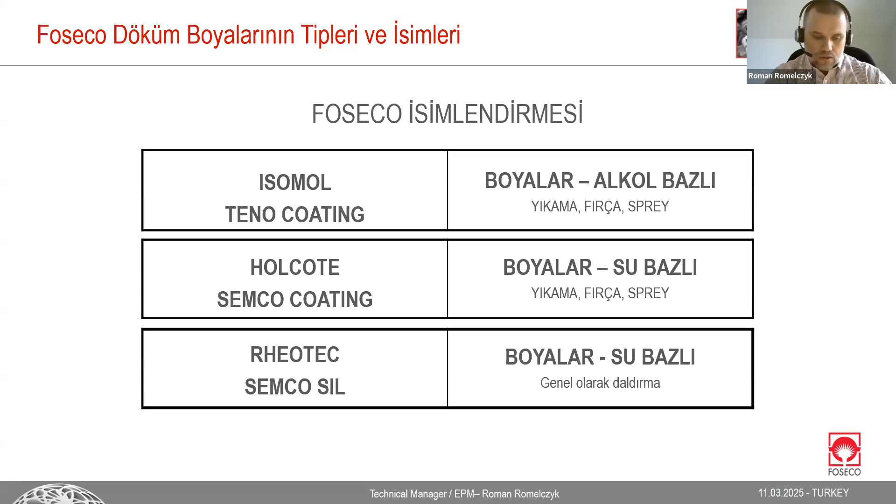We also can talk about special coatings, which are dedicated, for example, for green sand molding to improve the surface of green sand if any problems happened with the green sand recipe. Also for these special coatings, we can put in the same group some coatings from the Semco Zir group and Teno coating group.

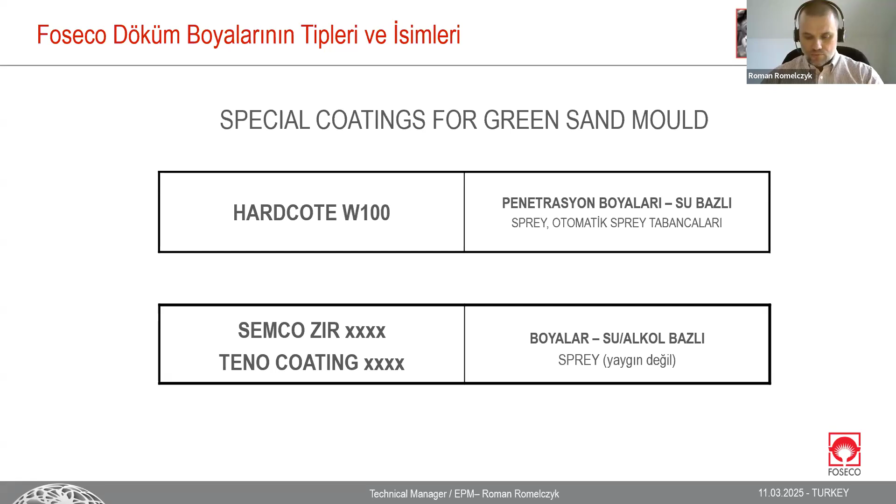As I said, I would like to talk about these coatings from the beginning. So first, I would like to talk about what the coating is, what is in the recipe, what kind of chemicals, what kind of materials are used to create the ready-to-use coating.

The first and most important, we can say, is the liquid carrier. As we said, water or alcohol. Alcohol can be isopropanol or ethanol. In some countries, we can also see blends of alcohol, so between ethanol and isopropanol. Very rarely, but it still happens, we also have some coatings based on methanol.

Of course, in Europe, in our region, it cannot be like that for safety and environmental reasons, so it's banned and blocked. The next one is a suspension agent.

It means that it's a special material or chemical which prevents sedimentation of solids. Solids like zirconium, corundum, aluminium oxides, and others are heavier than liquids such as water or alcohol. So this suspension agent takes care of keeping the solids suspended in the whole volume so they don't sedimentate.

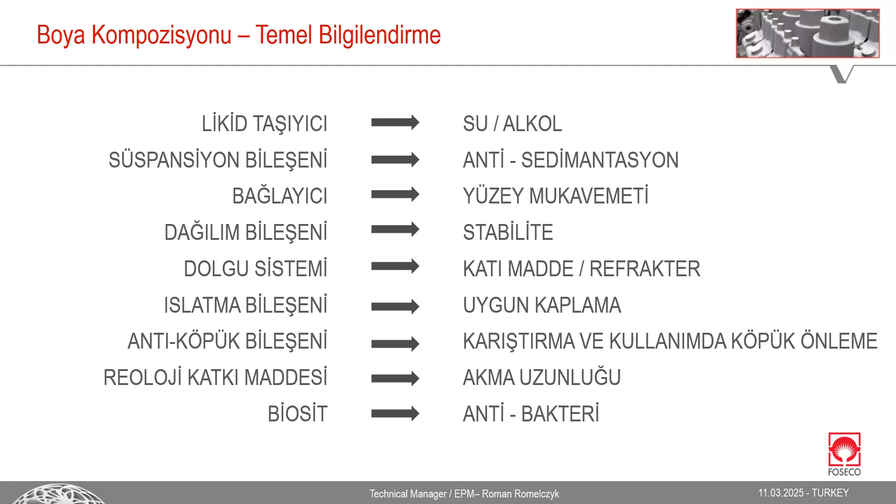Dispersion agent. This agent takes care of the coating during the time it is produced, put in the warehouse, or transported somewhere far from the production site. We need to be sure that the coating during this time will not change behavior, will not change its rheology or thixotropy behaviors. So this dispersion agent takes care of that.

I already touched on the filler system, solids, refractory solids. We will touch this point later.

Wetting agent, also a very important point. Wetting agent is nothing more than chemicals or materials which take care of the wetting angle. We can imagine we have PUCB cores, furan, alkaline phenolic, or others, for which release agents are used which are fatty. It means it's not always easy to cover them, especially with water-based coating. This is why this wetting agent improves, and takes care that the wetting angle will be enough to cover the surface everywhere in the same way, building the same layer thickness everywhere.

When we talk about alcohol-based coating, of course this kind of wetting agent doesn't exist, because alcohol itself has a very small, or depending on the literature, small or very big wetting angle, so there's no problem with it.

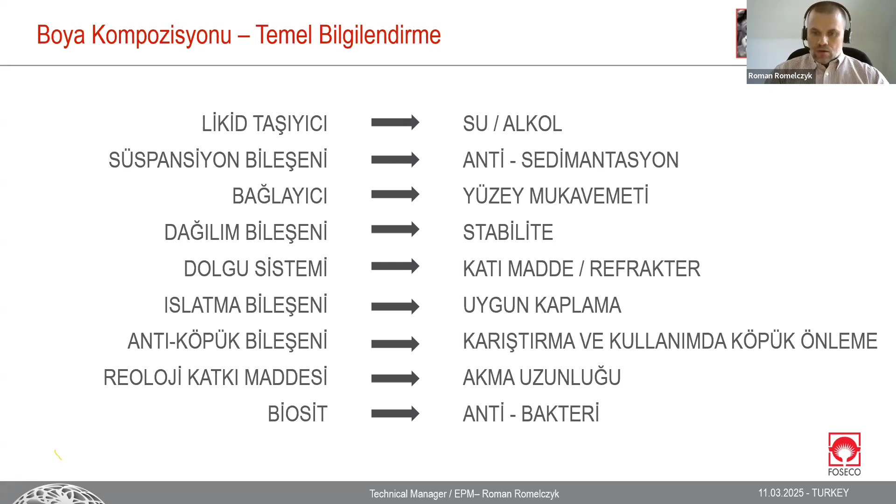So when we talk about solids and refractory materials, the most popular are zircon, corundum, magnesite. Between that, there's graphite, iron magnesium silicate - some kind of olivine - which is very, very popular. Also, as an addition, we use coke, and materials with a lower refractory point, like mullite and silica as well. These are the main raw materials which I believe you are familiar with and work with on a daily basis in your foundries or in your daily work.

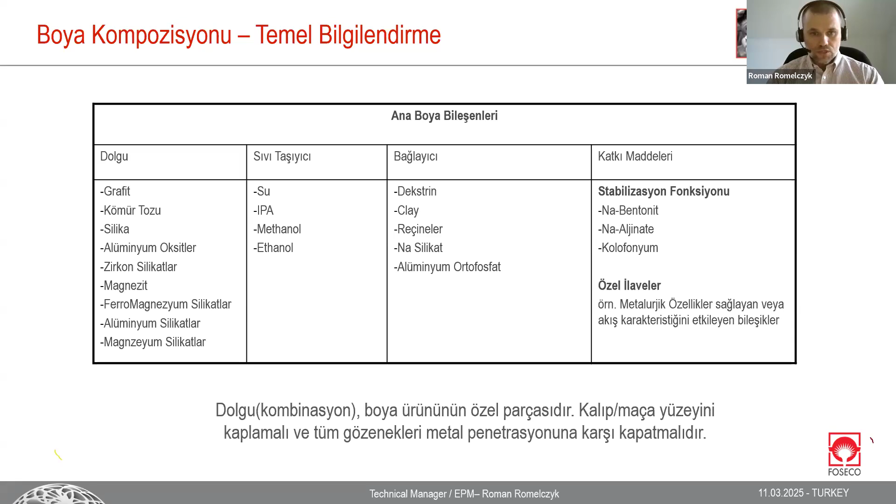So this is a part of the coating, and the big question is: for what do we use coating, why do we use coatings. When we talk about defects, the coating itself cannot cover mistakes in mold or core preparation, but it can help and support the surface finish. So problems like burning, metal penetration, veining - there's a special group of coatings which have anti-veining properties.

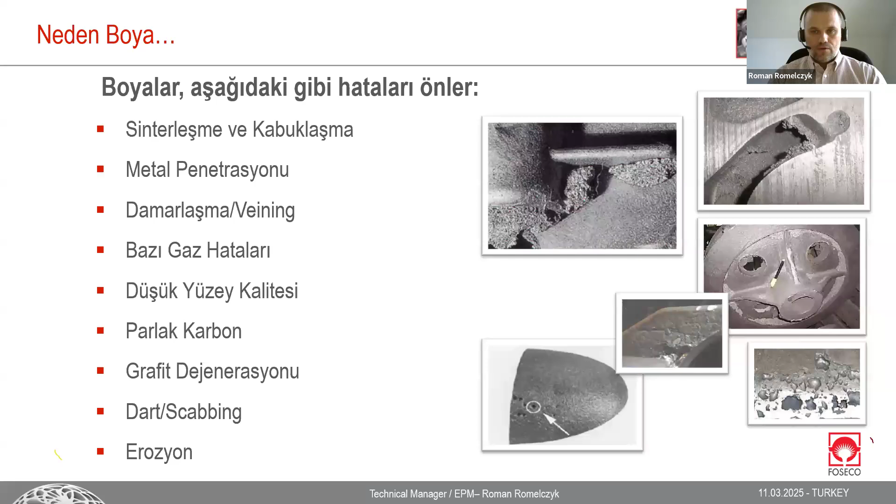Of course, some gas defects, lustrous carbon, and more others. Even some kind of filtration issues, like scabbing. If we talk about the furan mold process, the coatings are able to catch sulfur, which can affect nodular iron, the surface of the casting. So many defects can be improved by coatings.

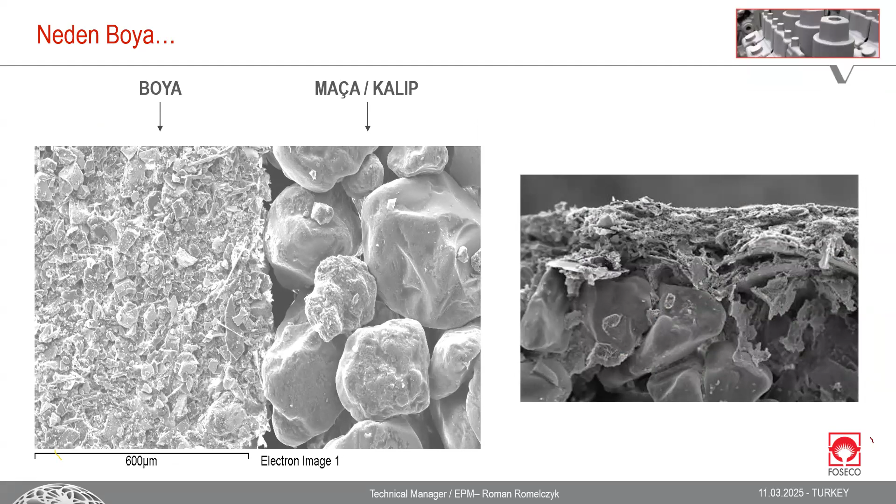So the coating itself, under quite big magnification or zooming, looks like what we can see in these pictures. On the left side we can see the layer of the coating; the right side, of course, is the mold. On the right side of the slide we can see some other coating, more flaky. We can also observe some penetration, so the coating is sucked into the mold by capillary effect, impregnating the layer. So that's how it looks.

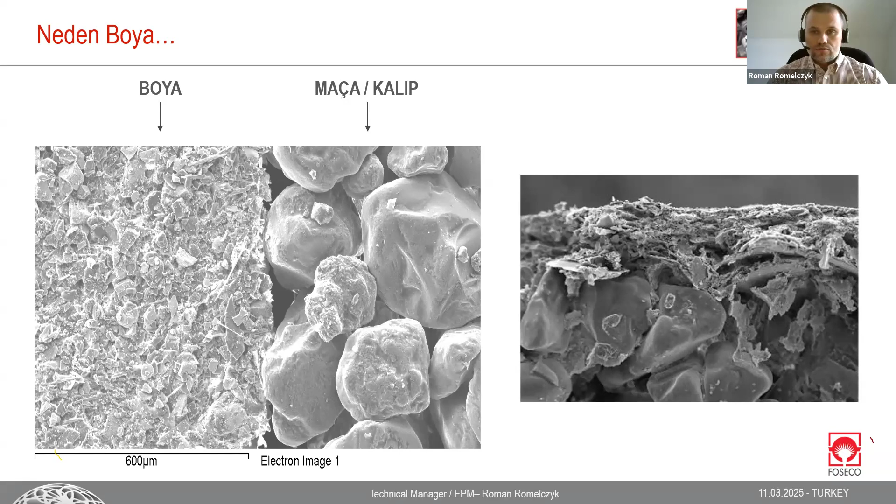Yeah, application methods.

This is an important slide because you can see the same coating applied in four pictures. It's the same coating, but differently applied on the same mold with different viscosity, because for spraying, brushing, dipping, and flow application methods, the viscosity of the coating, and automatically the density as well, is different. For flow and dipping, the coatings are more diluted.

It's around 12, 13, 14 seconds for dipping and flow. For brushing it's around 18 to 20 seconds, depending on what raw materials are used for coating. Zircon, which is roundish in shape, is quite easy to brush. Olivine or magnesite is not that easy for brushing, which is why we need to dilute more, around 18 seconds measured by DIN cup four millimeters.

When we talk about spraying, it depends on the equipment and coating you use, so the viscosity has quite a big range, between 14, 18, even 20, for airless systems that can also be used.

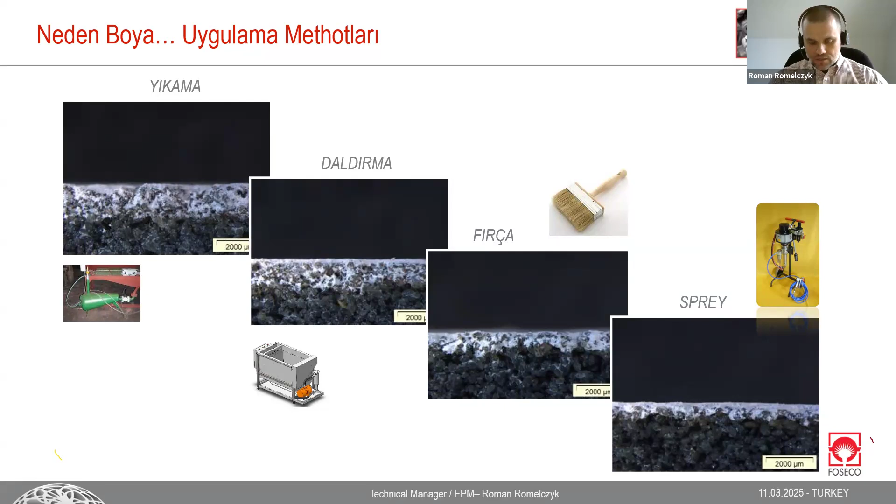The next topic is how to select coatings, so which base, from a raw material and solids point of view, can be used for what kind of alloys. It's not that complicated, but we can still find some problems with it.

For steel, we use solids with high refractory behavior, like zircon, magnesite, aluminum oxides, and corundum. For gray iron, we can use what is used for steel plus some graphite. For heavy metals, we focus on graphite, coke, silicates, magnesium silicates, and zircon as well. For aluminums: graphite, coke, magnesium silicates, and finally zircon and aluminum silicate.

Zircon is the most popular raw material, often used with other mixtures. A coating dedicated for steel isn't necessarily pure zircon, it can be a mixture between zircon and corundum, or mixed specially for gray iron or nodular iron if needed, combining zircon, olivine, and graphite or coke. So there are many possibilities here.

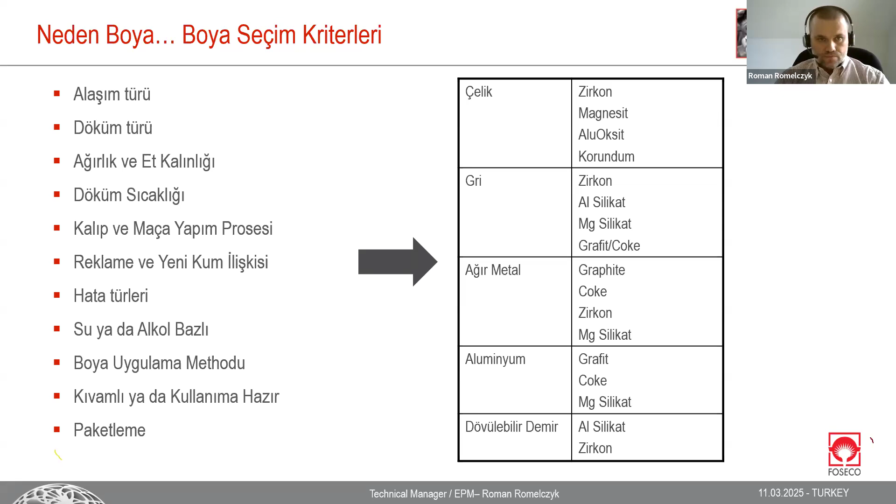So now we know a bit about the recipe, the application methods, and the raw materials we use, the refractory solids. Now I will switch to the topic of usage.

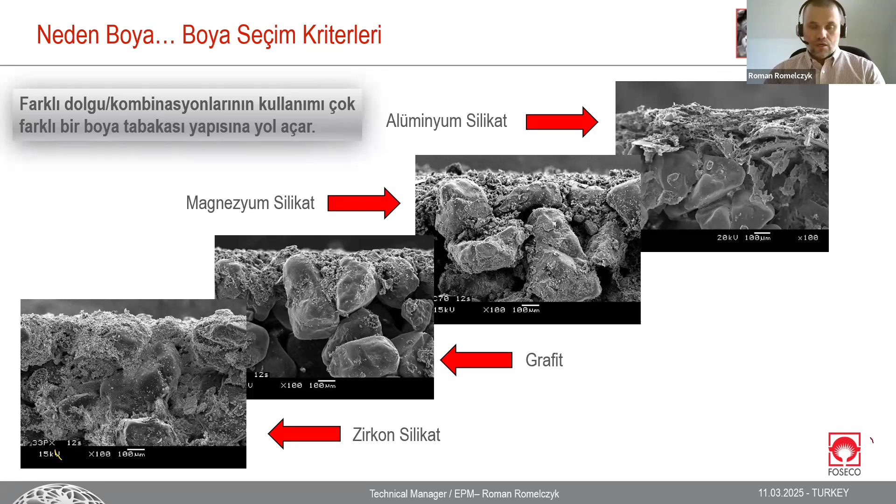What kind of mistakes are very often observed during application? As I already explained, sometimes the coating is not properly selected. It's also important that the recipe itself has 10, 11, 12 different materials mixed together with different weight and density, so this coating always needs to be super precisely mixed before use, to be sure all materials work together. An observed mistake is that it's not properly mixed.

What's more, and I'll touch on this point later, it's also very often the case that the coating during preparation and after application is not controlled, things like viscosity, density, Baumé, wet layer thickness, dry layer thickness. Wet and dry layer thickness will always be different because of shrinking during drying, since if the carrier disappears, the coating will obviously shrink a bit.

What's more, this is not without reason. These pictures show the mold or core just after the coating is applied. Now we talk about alcohol-based coatings. Just after application, the mold or core is set on fire, meaning we don't wait any minutes, 10 minutes, half an hour, but immediately we burn it out. It's quite a big mistake, and I will try to explain and show why.

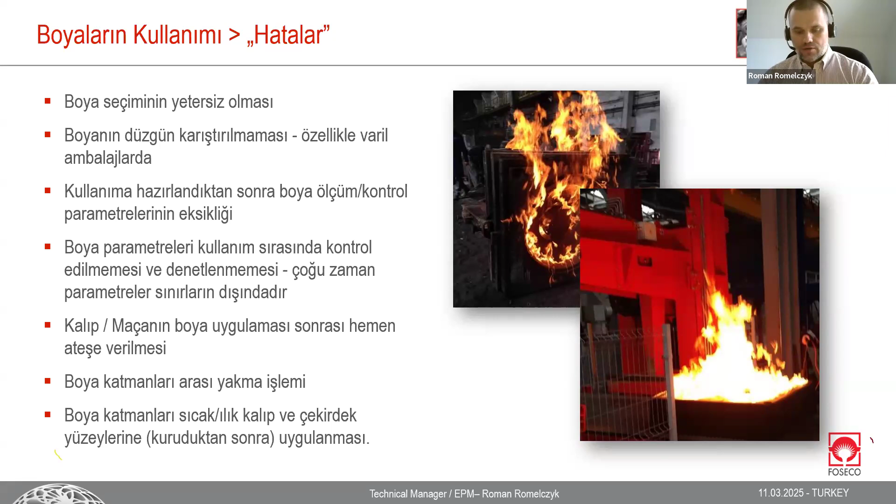So the advice is nothing more than the opposite of what I showed before. We need to mix, we need to control, we need to take care about wet-on-wet layer application. Drying by flame, yes, but really only if it's needed - that's the first point. Another one: if it's needed, don't rush, don't be in a hurry with it.

Wait some minutes to give a chance to finish some kind of matting time, so the mold or core stops being shiny. It means that the alcohol disappeared inside, sucked in by the core or mold, and evaporates a bit, and after that we can burn it out, put it on fire. Why? Because if this coating disappears inside and outside, evaporating a bit, the energy created during the flaming will be less.

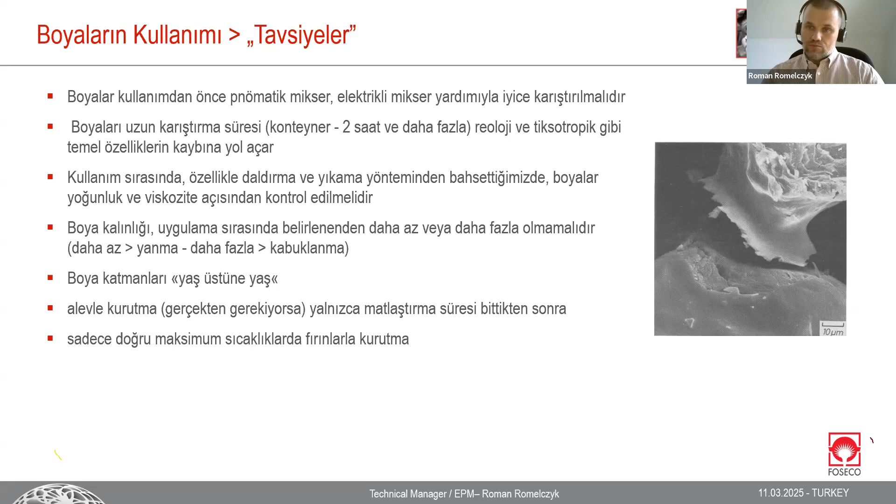In the picture, you can see the bridge - this is a binder bridge between the grain sizes. These binder bridges are killed and damaged by fire. So this is not exactly a picture showing the influence of fire, but it's only to give you a visual effect of how the bridges look like. If we destroy these bridges, it means the sand cannot stick together strongly enough.

Tools which can be used very easily everywhere in the foundry: on the left side, top, it's a comb for checking the wet layer thickness. Very often it's also used to check dry layer thickness - we need to scratch a bit, it's not super precise, but it's still able to check and compare wet with dry. Pycnometer, very simple tool.

For this pycnometer we also need a balance, a small balance, and we need 2-3 minutes to know exactly what kind of density we have. Ford cup, DIN4, this is a 100 milliliter cup, and we can measure viscosity very quickly. Baumé, it's a measurement somewhere between viscosity, density, and also rheology.

So Baumé is still in use, but for foundry usage it's quite imprecise. For production and QC lab it's useful, for foundry it gives guidelines. It's not super precise, but still in use, and it's possible to get by with it.

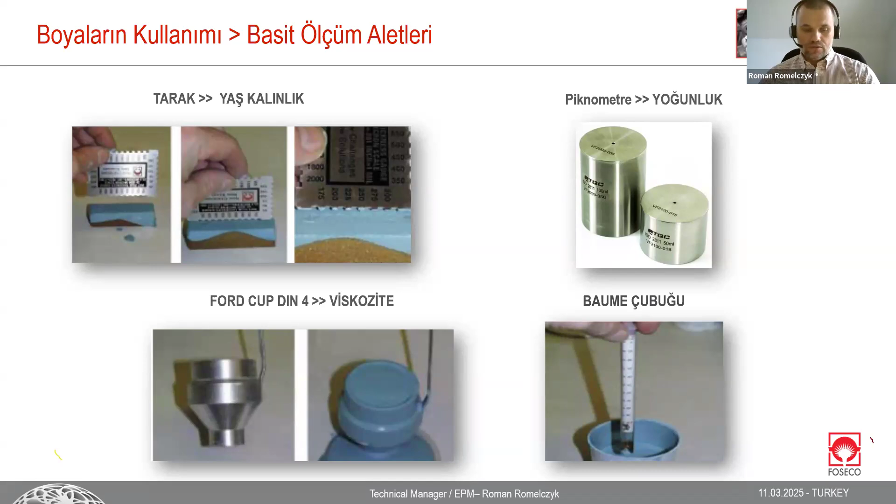So, coatings in use, and very shortly about laboratory research on alcohol-based coatings, and putting them on fire, or flaming - drying the coatings rapidly. What will be the effect? This is only to give you the flavor of how the research looks like.

Sorry, excuse me. So we talk about the Furan process. It was prepared with more than 100 strength bars, 90 of them were used for it. All the samples were taken 8 hours after molding, meaning the samples were prepared during that time especially for this usage. So each bar which was checked in a transverse test on the machine was exactly at the same curing stage of the process, to be super precise about the readings.

These samples were covered with different coatings. It was ZKPX - ZKPX is nothing more than a zircon-based coating. It's an impregnation coating, which impregnates only the core or mold, to improve the refractory behavior of the core or mold. After that, ZBBP16 was applied, also a zircon-based coating, but in an alcohol base. Each of these bars, as I said, was taken after 8 hours - so after 8 hours, the coating was applied.

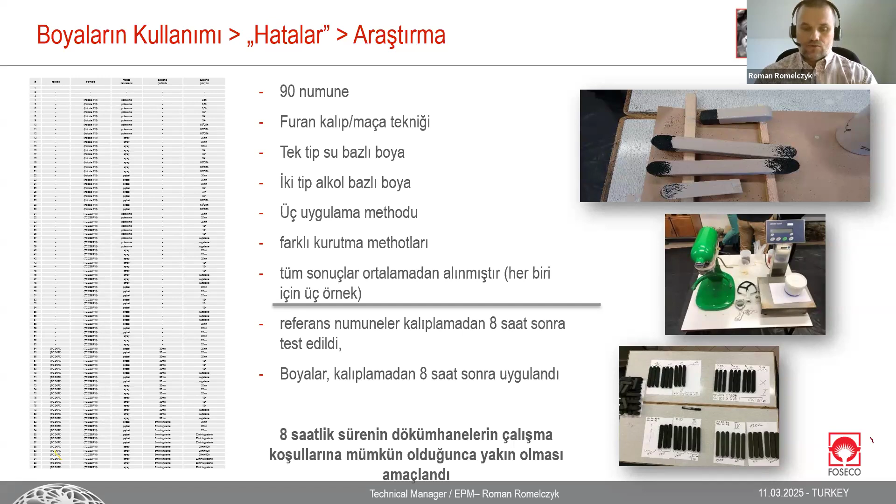When we talk about 12 hours drying in the ambient temperature, alcohol has a chance to evaporate. The jelly form of binders, we can say, goes back to normal.

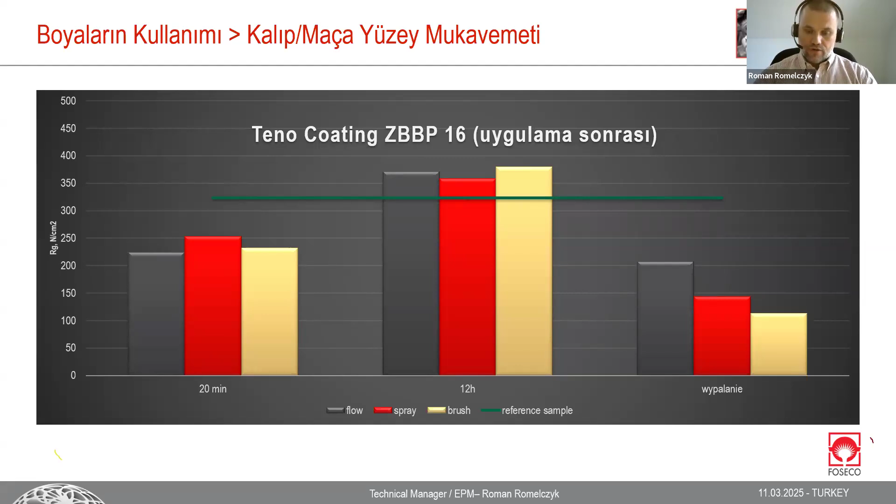For more, different coatings were tested, as I said. One coat is a water-based coating, another is alcohol, another is a penetration coating. It's been super diluted, 12 seconds DIN 4 cup. This is a mixture, ZKPX, so penetration coating, and an external one.

And the same on the right side, but different drying method. So always, if we talk about self-drying 24 hours, strength is higher than the original green line. When we talk about oven drying, it's also a chance to have quite nice strength. Another one, 12 hours, what we already discussed for alcohol base, is better than the original green line. Mixture between ZKPX and ZBBP16.

Only when we talk about self-drying 12 hours is it, we can say, close to the expected original strength. If we talk about the last one, this is another way, but still, as you can see, the strength is divided by 2, more or less.

So this is how the drying process of alcohol-based coatings are super sensitive, and it's very important to understand that time is very important here. More time between application and putting on fire is better for the core or mold, and finally for casting quality.

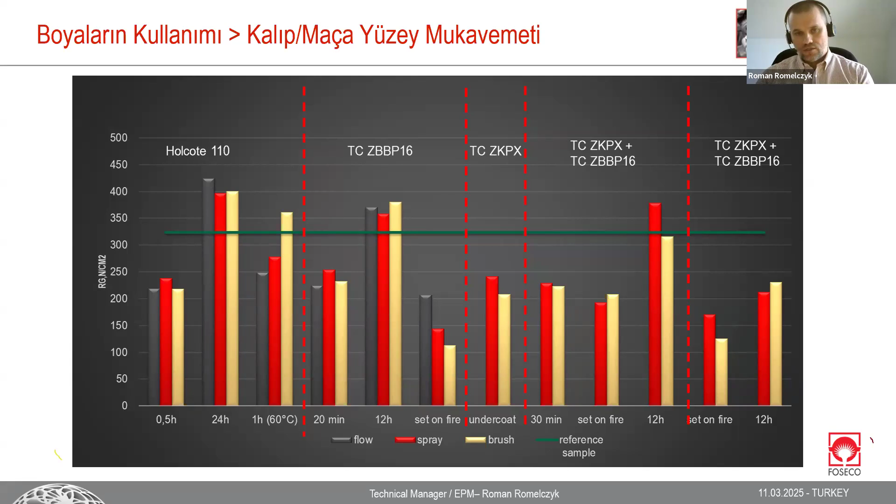So, conclusions from this research or study, already presented to you: not immediate set on fire. The best solution, we can say, is self-drying, or use an oven for drying. If not, leave the core or mold as long as possible for self-drying.

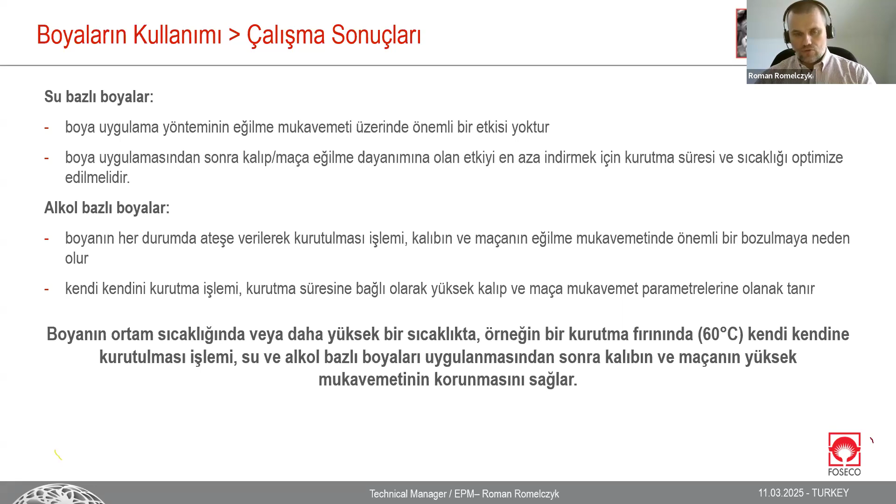Some words about packaging and also application equipment. First, the most popular are barrels. Barrels can be different: 200 liters, 600 liters, 50, plastic 150 liters, 25.

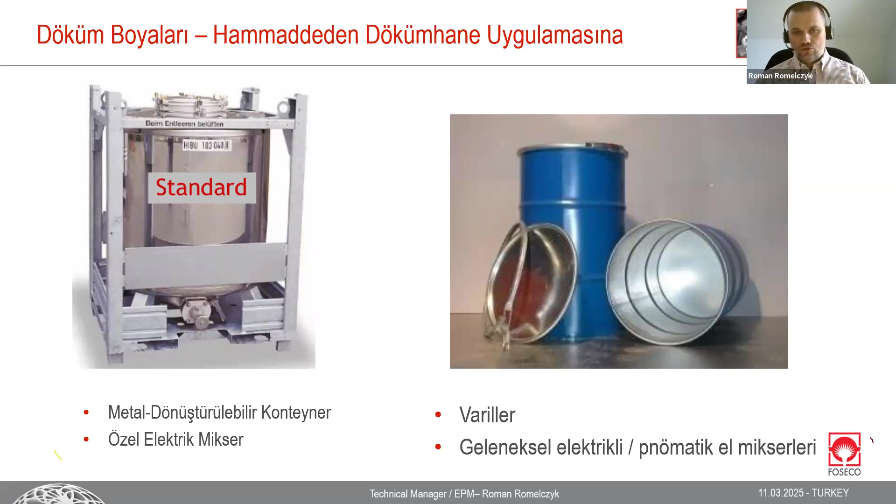Currently, we can say this is the best solution to be sure everything is fine with the coating during storage, but also during usage, because you can put a dedicated special mixer through the lid of the container, mix properly, because the mixer is designed especially for that kind of container shape. It's also possible to have some kind of timer, so you don't need to take care about the timing of the mixer - the timer will do it by itself. So you can be sure that whenever you use the coating, it's ready to use.

Application methods or equipment for application, quite popular. This is the airless system. The prepared and diluted coating is pushed by high pressure through a special nozzle, so there's no atomization, meaning we don't have dust and fumes around when we apply the mold.

The disadvantage is that it's such a productive way of spraying that if we have complicated shapes, pockets, holes, and that kind of thing, it's not always the best choice for application. It's dedicated for big molds with quite easy shapes, and it really improves productivity and the time needed to apply the coating layer.

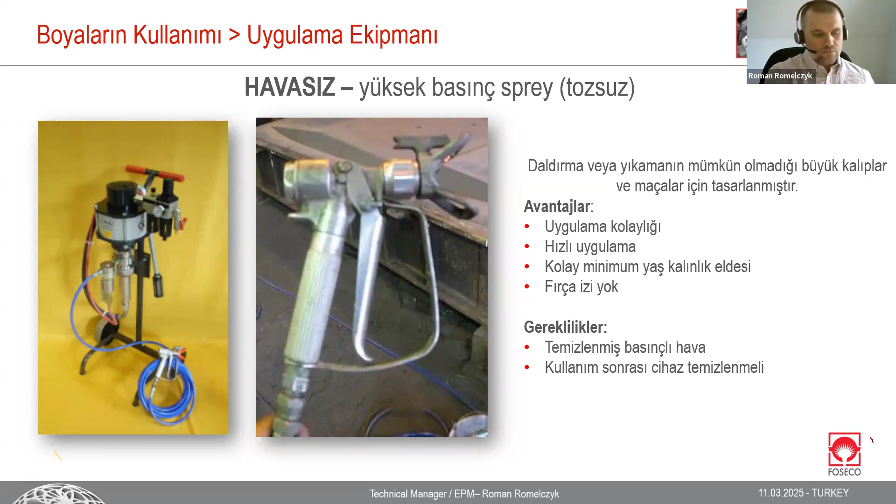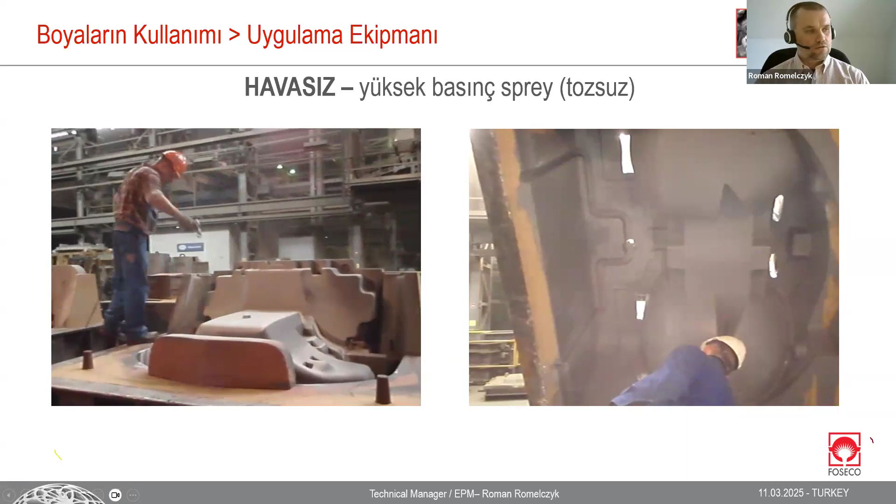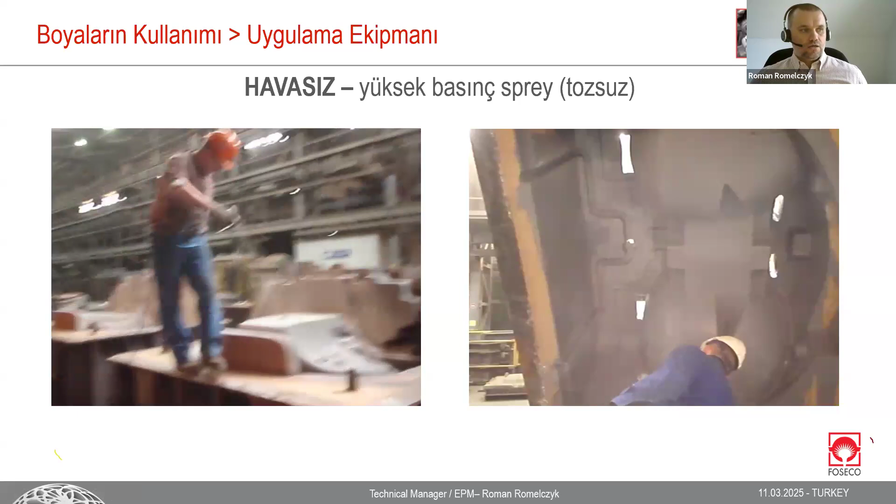To show you how the airless looks like in real life and how productive it is, you can see on the movie - no dust, no fumes, long distance between operator and the mold. This mold is half prepared, and this is the final layer of thickness to cover all scratches, mistakes, and like that.

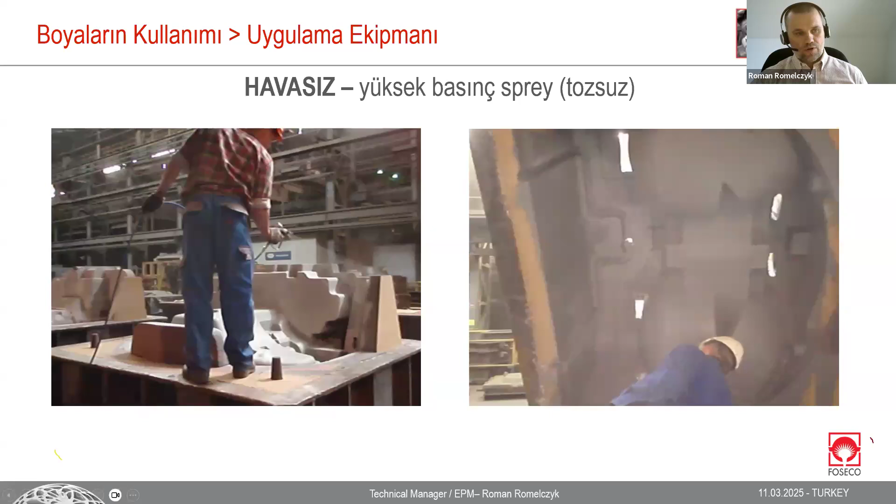As you can see, it's very easy, and the layer is applied very fast. On the right side it's exactly the same mold, but the top part. The first layer was applied by flow, and the final layer, to improve the wet layer thickness, was applied by spray gun as well. You can see how it looks and how precise and fast it can be.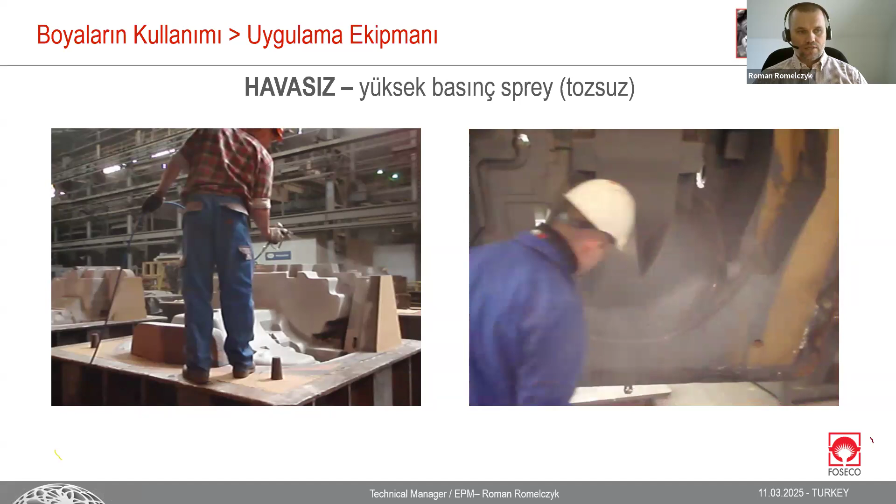This application gives you a chance to apply something like 1.2 to 1.3 millimeters of coating, just that fast. And now it's applied at some kind of 0.25 average, very fast.

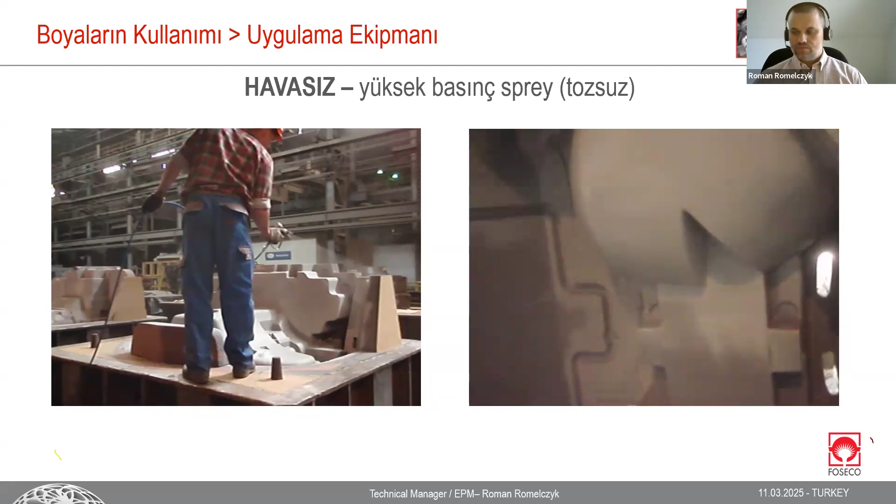That's it. Another very popular and very good, in my opinion, application method is flow.

For that kind of application method, it's a specially designed recipe with long flow, to give us a chance to have a layer thickness without drops, tears, and a constant level of layer over the whole mold.

The difference between the top part of the mold, visible in the picture, and the bottom part - if everything is prepared correctly, there will of course be a difference, but usually it's some kind of 50 microns, sometimes 100 microns. It depends on the size of the mold.

But in general, this is a super fast and very, very good application method, used, we can say, for complicated shapes, when we expect very high refractory resistance, so the coating has a chance to impregnate the mold.

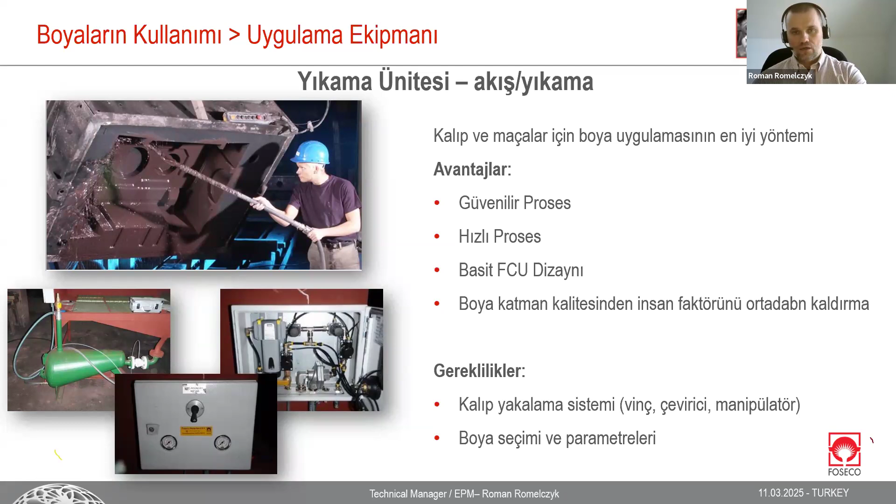We can apply 2 layers, as I presented before - first layer by flow, second by spray. So this application method gives us a big chance to have nice casting quality.

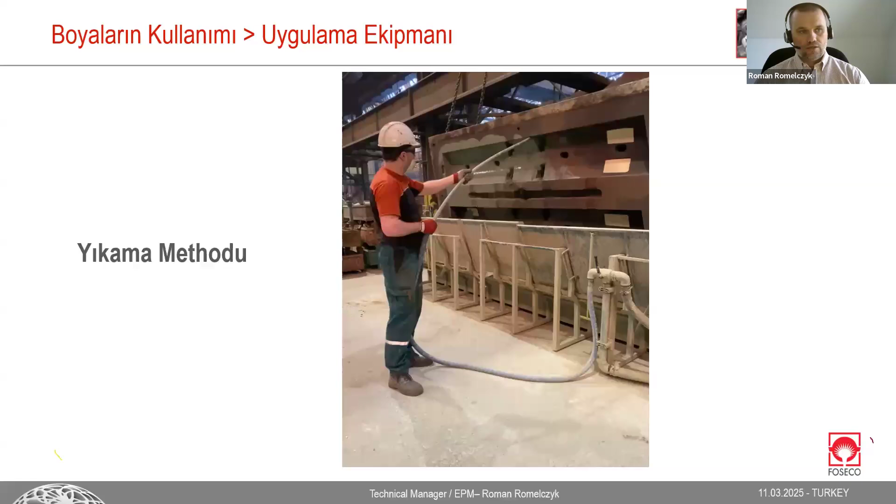How it looks like, I also prepared a short movie. This is the process itself. It's alkaline phenolic. The produced castings are based on Hadfield steel, so manganese one.

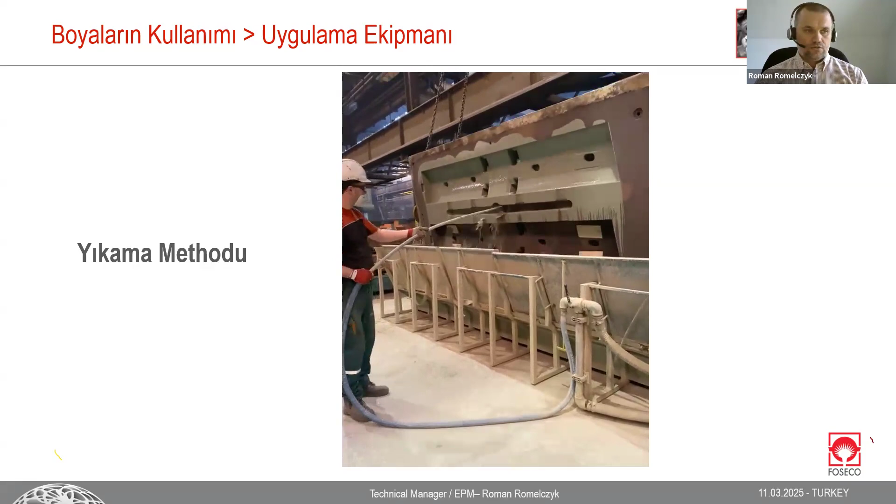Yes, alkaline phenolic, and the coating itself is especially designed, of course, for flow, and it's on a base of magnesium - so it's a pure magnesium coating, magnesite coating.

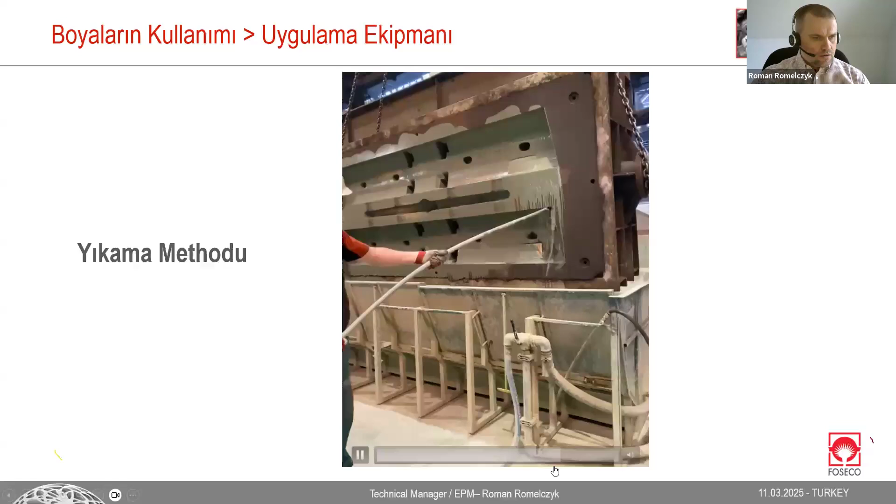Big mold, one layer applied for this mold, and it takes less than a minute to apply the coating on the mold.

What's more, probably a lot of you heard about ICU - idea. It's an intelligent coating unit. In general, this unit will take care of the coating preparation.

So it means we deliver coating in a container. Another part is a thinner, so water from the system or alcohol from another container, an IBC plastic one for example. We join these two containers to this equipment, this unit.

The unit will dose the delivered coating in a calculated amount, mixed together with alcohol or thinner - water or alcohol - in a preparation tank, and the density and viscosity which you want to have, you put it on the LCD screen in the touch panel, and the unit itself will take care of giving you exactly the coating you expect.

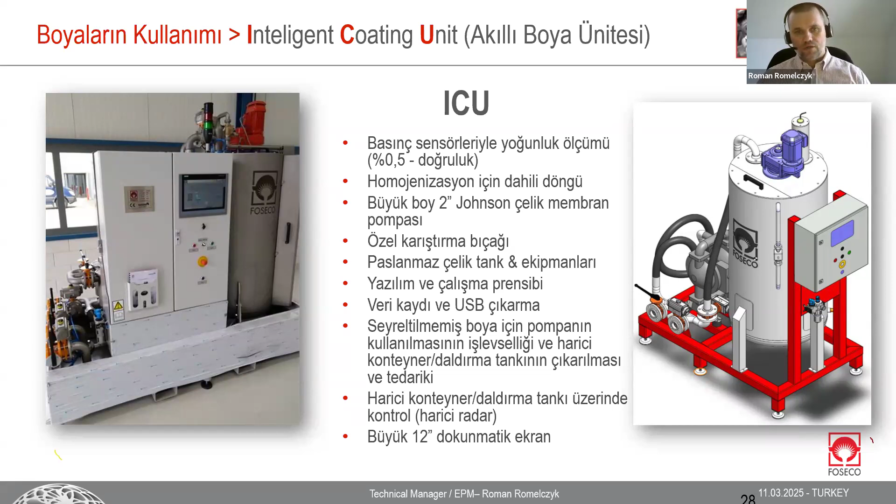So if you put 1.25 grams per cubic centimeter, the unit will prepare for you exactly this value.

As you can see, it's a different solution of this idea. ICU Pro, we can say, puts it all in one unit. So it's the full type, also with ATEX regulation.

So you can use it for alcohol-based coating, super safe with all features: archive, GSM controlling, intranet, internet, everything can be archived. Archive can be consumption of coating, consumption of water or alcohol, what is the history of density, the periods of the unit. So when was a preparation, when was a usage, when was a circulation, what was a checking, we can say level. Everything can be archived.

Put it in a history, and for example, a manager somewhere in an office can connect directly to the machine, upload the data, and observe what's going on with parameters when we talk about the coatings.

Another solution is ICU continuous, exactly the same usability, but in a different way. The checking, we can say, is continuous. So the preparation tank can be used also as a buffer. So it's a more universal one.

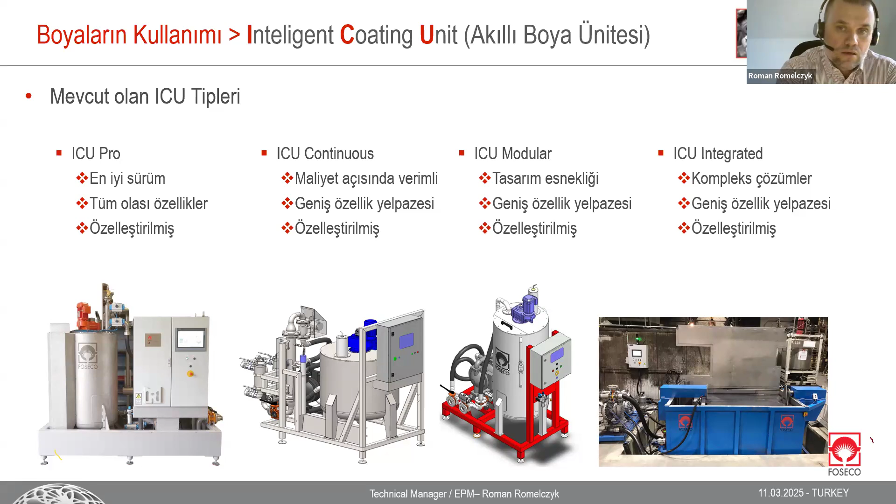Yeah, some examples of usage from real life. So we can say case studies. So here we talk about pure

zircon-based coatings, ZKPX - maybe you remember, this is a penetration coating, impregnation coating, which improves quite deeply because it's 4 to 8 millimeters deep into the refractory of the mold or core. It also prevents the penetration possibility, metal penetration possibility. And ZBBP16, this is a coating which builds the external layer.

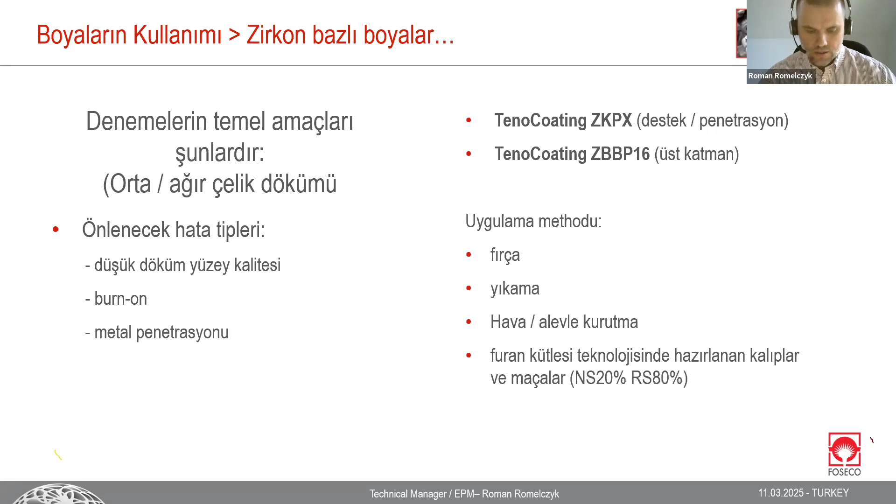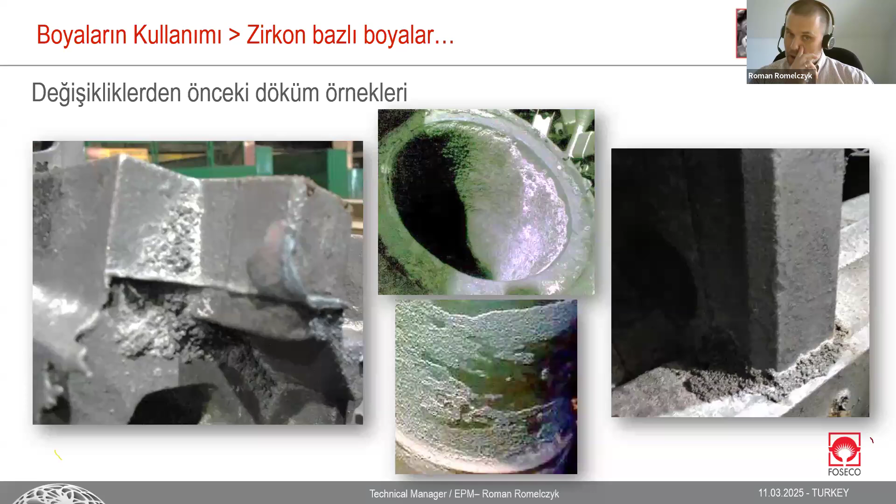This layer will face directly with molten metal. These are, we can say, normal problems which we can find in foundries. If something is not correct, or the casting itself is difficult to manage - in some cases it's like that, but it's that difficult that it's not easy to manage to have casting without defects. But the left side, this is how a mold looks after ZKPX application.

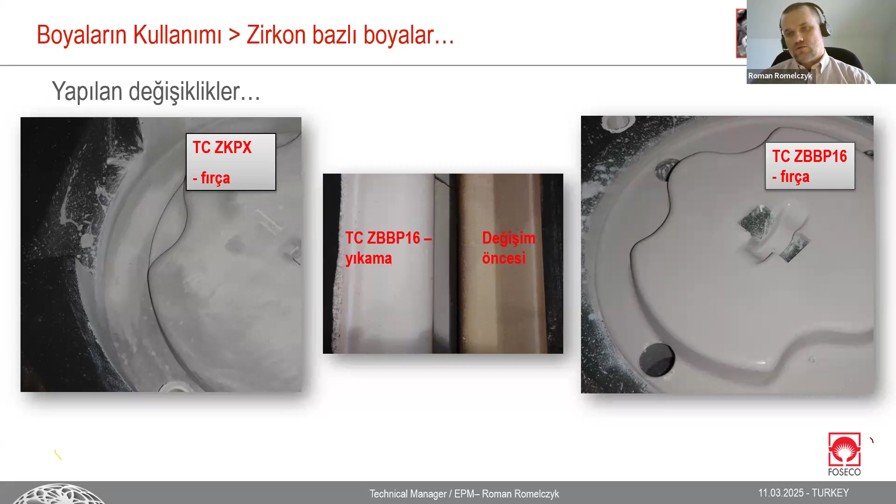So it means that the layer is not built up. The normal viscosity for ZKPX is between 12 and 13 seconds, so it's a consistency of milk - very diluted. Everything needs to disappear into the mold. The right side, just wet on wet - ZKPX is applied, then ZBBP16 is applied.

Here is an example of how ZKPX works. On the right side, you can see that the structure of the sand is still visible after ZKPX application. And on the left side, the core is especially broken for this picture to observe how deeply this zircon flour can impregnate the core, and how strongly it can work to prevent metal penetration and improve refractory.

Of course, I mentioned it here also - 9770P TenoCoating. It gives you the idea that it's possible to have a water-based impregnation coating. And what's more, these impregnation coatings can be zirconium and corundum.

And why? Because when we talk about zirconium, in some situations, zirconium can be the reason to create a fayalite defect. Because in the chemical formula you can find silicates, and the whole chemical formula gives you the idea why it happens, and the fayalite itself can be created. When we talk about corundum, it's more neutral from that perspective. So we use corundum when we can be sure that we will not start fayalite creation. This is why both minerals are used for these impregnation coatings.

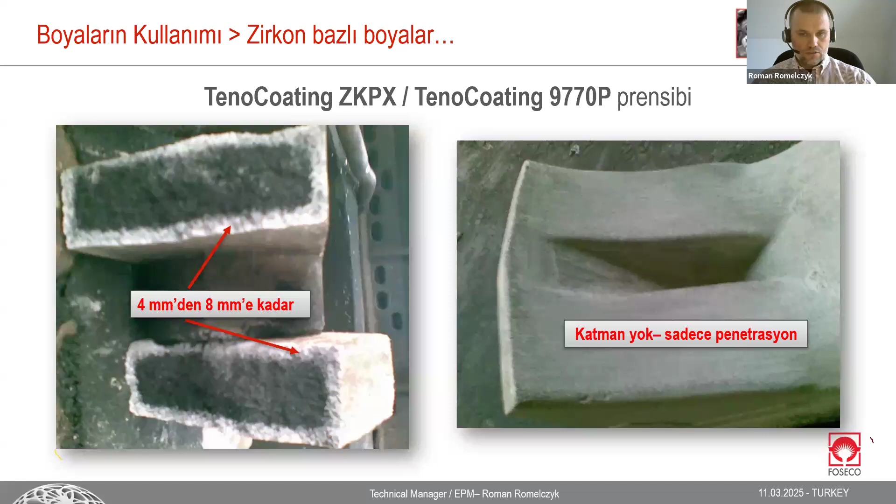This is only several pictures of how the casting can look after some improvements, some changes, without any burn-on. You can see that the castings were not machined, not ground by machines - it's just simply after shot blasting.

What's more here, you can see these pockets on the core. Originally, chromite sand was used for it, but because of the usage of impregnation coating, these cores were made with fresh silica sand. It was a Furan process, using silica sand and ZKPX impregnation coating, with normal zircon top coat, and we were able to receive that kind of results.

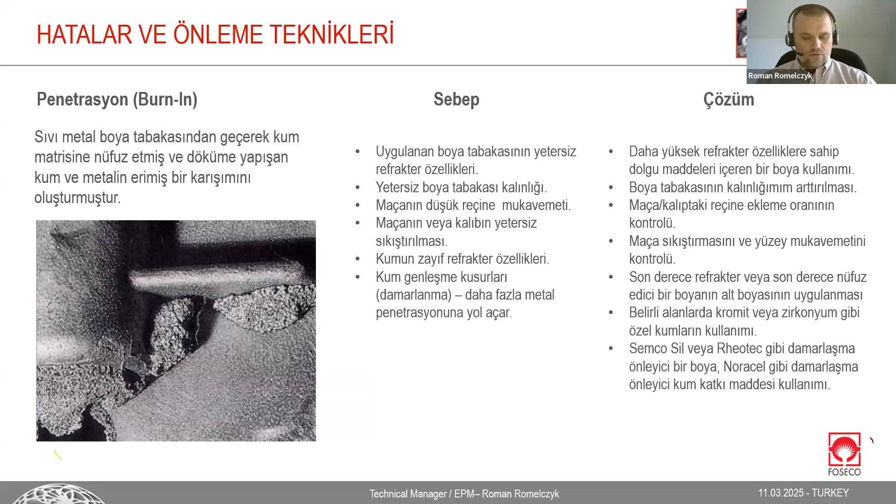Okay, another one: coating inclusions. A lot of possible root causes, such as high speed of molten metal, so we can say turbulent flow, velocity as well, and also the venting of the mold or core.

So to prevent it, it's the opposite of what I said: we can recalculate the runner system, so redesign it, use a different way of applying the coating to be sure it's adhesive and sticking. It's enough to take care about the running gate itself, that it also should be covered by the coating. So there are many possible solutions.

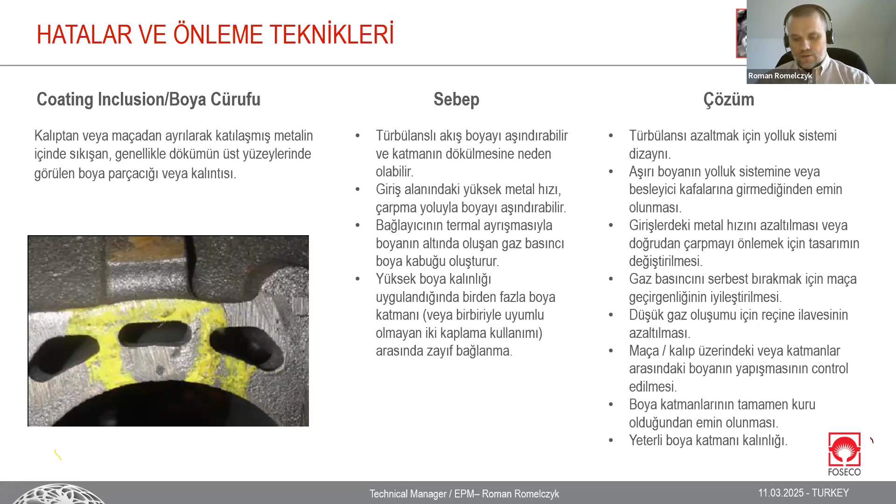Another one, also very popular, is burn-on. As always, we can find that the LOI from reclaimed sand is too high, the mixture ratio between fresh sand and reclaimed sand is not correct, some other parameters of the sand are not correct, or the coating is not properly mixed and applied. The layer of the coating is not enough.

In some cases, it needs to be chromite, as I explained. If not chromite, we can think about using facing sand only from fresh sand, not a mixture between reclaimed sand and fresh sand. So there are many possibilities to improve the situation with burn-on, and of course you can also use a pre-coat to help and improve things.

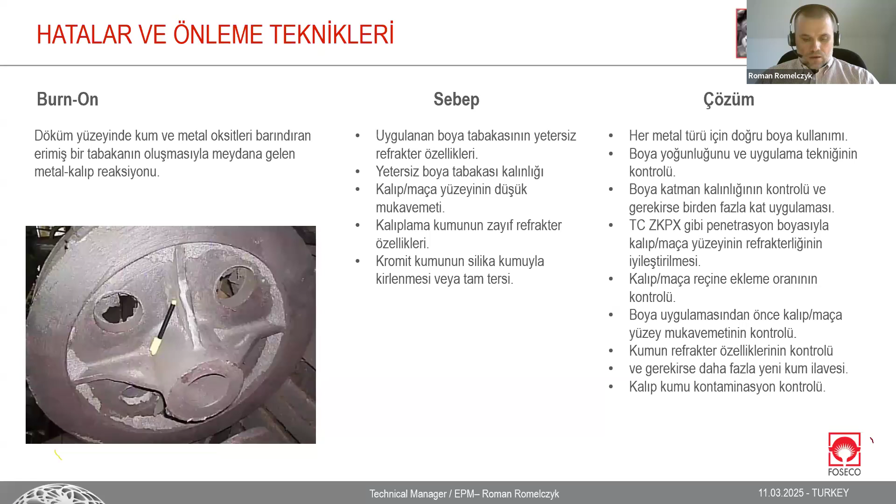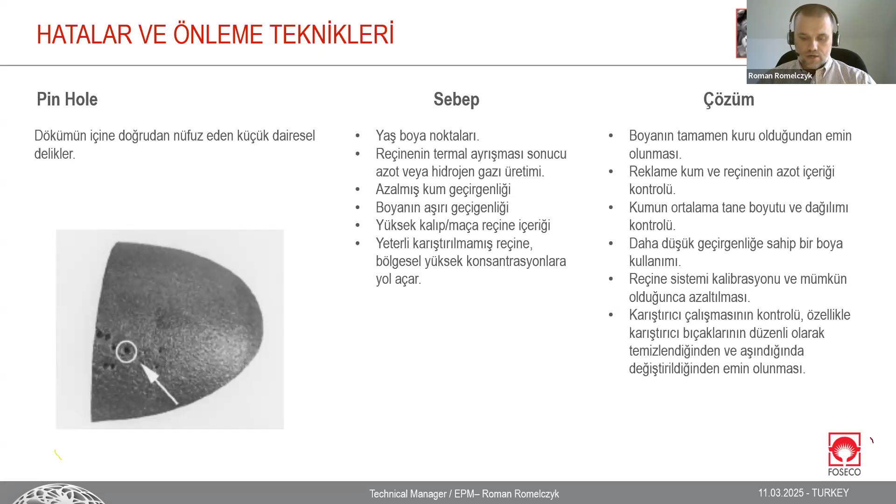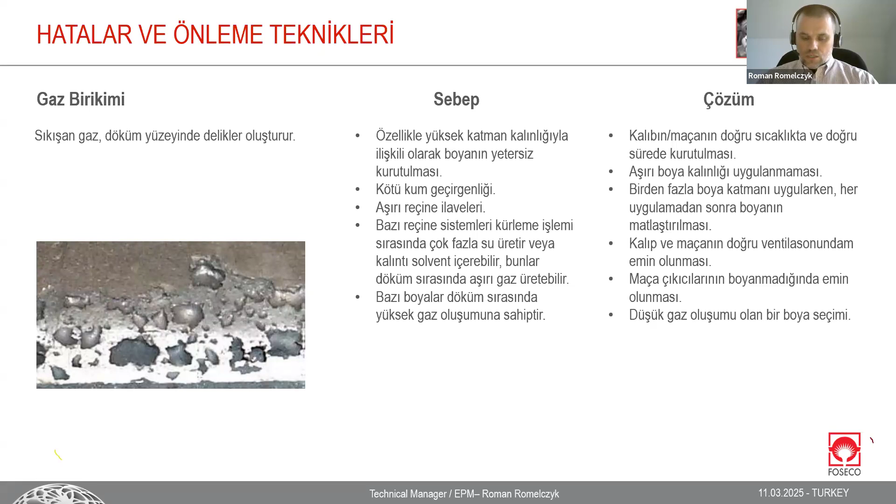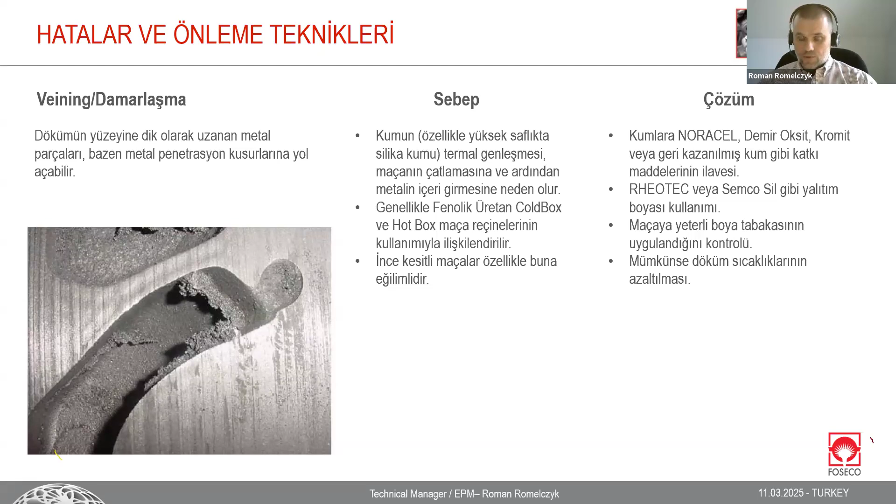As I partly explained, solutions use different sand, the sand grain distribution, special coatings to reduce these tensions and expansion in the mold or core.